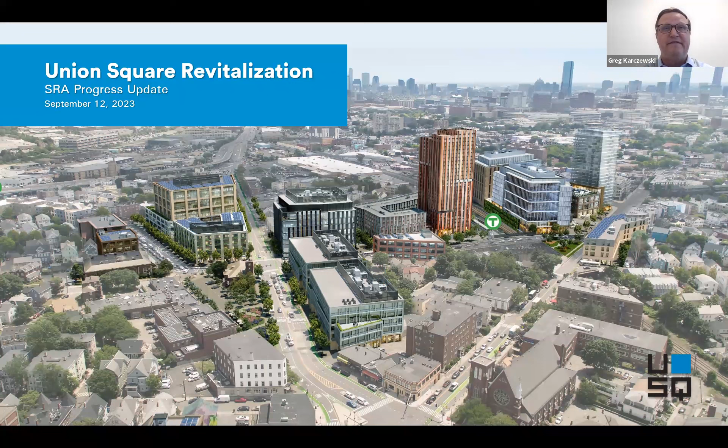The goal of the conversation tonight is to provide an update on how we're progressing against the master plan broadly, and then a more specific update around the initial phase, 10 to 50 Prospect, formerly known as D2. There'll be time for questions, and I also wanted to run through some of the community benefits work we've been doing over the last period of time.

From a master project update standpoint, to ground everybody in the foundation of the project, all the work we're doing goes back to the community's goals established in SomerVision, broadly around job creation, adding open space to Somerville, providing a mix of housing including affordable housing, and improving mobility in the many different ways to get in and around the city.

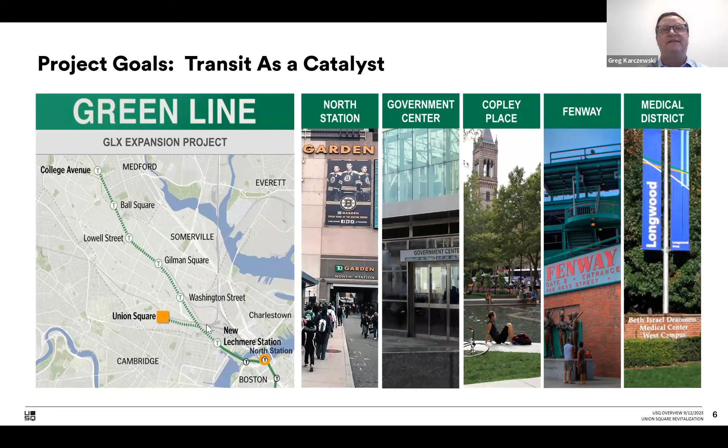More specifically, as it related to Union Square, it was focused on transforming Union Square into a dynamic mixed-use economic engine, really to restore it to its commercial past as a downtown in Somerville. Critical to that, as everybody knows, is the Green Line and the connectivity it would provide to the broader economy here in Boston.

Our process started before us back in 2012 with the approval of the revitalization plan. We were designated back in 2014. From 2014 to 2017, the city and community were leading a process that started with SomerVision and became increasingly more definitive about zoning and the neighborhood plan, ultimately resulting in a covenant related to the D blocks.

Since then, from 2017 through current, we went through design and site plan review on the first phase, negotiated a community benefits agreement—the first in the history of Somerville—completed the MEPA process, and then in the middle of the pandemic started construction on the phase 1 project, which we're nearly complete with.

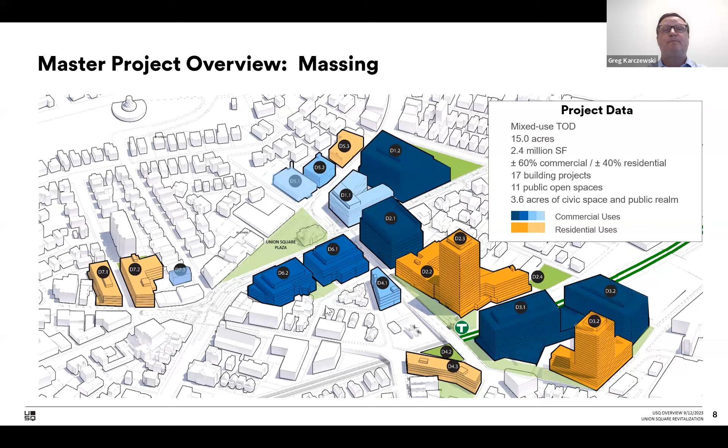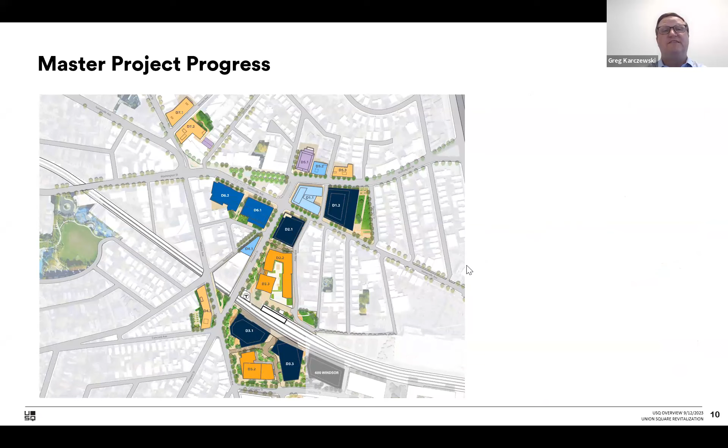All the buildings you see in some shade of blue are commercial projects, and all the buildings in some shade of orange are residential projects. Now just shifting views—same image, but in a site plan view. Again, commercial projects are in blue, residential projects are in orange.

I'm going to walk through where we've been focused, where we'll be focusing next, and what's happening with the master plan. Overall, the master plan is 2.4 million square feet. The D2 block, outlined here by number 1, is obviously the first phase. It's 607,000 square feet—we'll cover that in more detail as my comments continue—but that represents 25% of the overall master plan area.

We've also been advancing two other projects. One is the D3.1 block, immediately on the other side of the tracks from the D2 blocks - a 280,000 square foot life sciences project. The third project is our efforts to start the D4.3 affordable housing project. In total, these three projects would make up 40% of the master plan area.

The MLDA requires that we get 50% done by 2037. So just to put in context expectations around timing, we continue to work out of our offices here at 31 Union Square every day to advance the overall master plan. But that gives you a sense of how we're progressing against the broader objectives outlined in the MLDA.

In addition, there are a number of other sites where we've been in some level of pursuit activity, whether that's additional planning related to those sites, business plan development, or interactions with the owners around acquisition. You can see those blocks outlined by this P for pursuit.

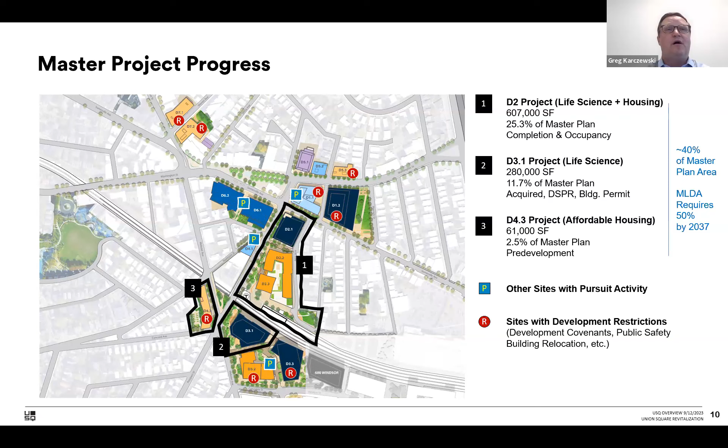We also wanted to highlight that there are some restrictions on various sites within the master plan that preclude their immediate development. Whether there's our development covenant with the city that precludes any additional residential development until the second commercial building is developed, or the public safety building relocation, which occupies a large portion of the D1 block, or the covenant that sits on the Royal Hospitality site - all sites with an R on them have some sort of constraint at this moment. We continue to pursue and monitor them, working towards removing those constraints so we can implement the entirety of the plan.

So that's a bit of an overview on the master plan. We'll now transition to the D2 project, or 10 to 50 Prospect. We're putting the D2 label away after many years.

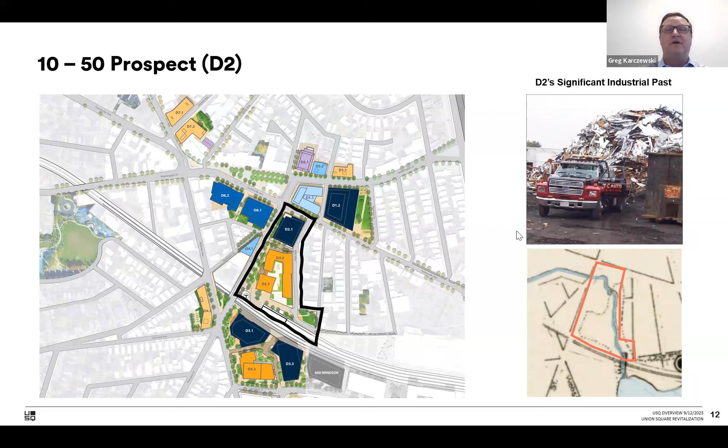D2, as you may remember, has a really significant industrial past. It had environmental contamination - it was a scrapyard. A majority of the site was a scrapyard, and the Millers River actually ran through the site at one point in its history. So the city's vision really was, because of its location next to the T, to make it the first phase of the revitalization and really reclaim the property and transform it into a productive use.

As the plan for D2 evolved, we were excited that the plans really were emblematic of all the different goals of SomerVision. First, the creation of new mobility infrastructure - we'll talk about the work we've done with the T to enable the station opening. New housing, including 90 affordable housing units, space for 500 new employees and jobs, over 33,000 square feet of open space, and a number of economic and fiscal benefits in the form of taxes, as well as acquisition of the property. In addition, D2 plays an important role in connecting the longtime living room of the community, Union Square Plaza, with the new node in the neighborhood, the MBTA station. So really finishing that streetscape along Prospect was viewed as an important goal for the project.

Now I'm going to show you over the last 30 months in 30 seconds, kind of the work that's been done on site here. Let me get this started.

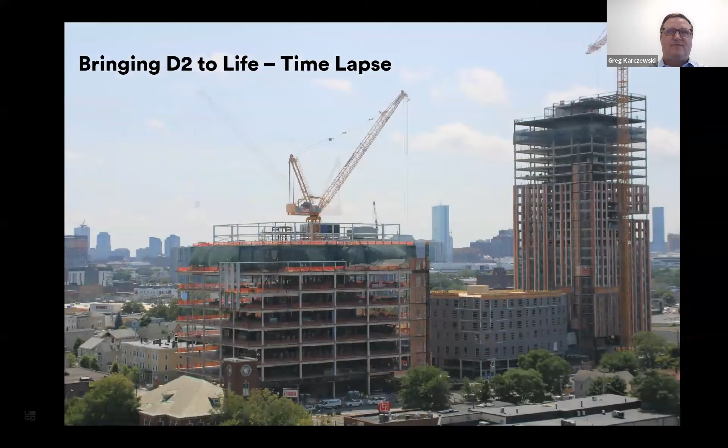And if only it was that easy, right? So that's a current view of the building.

The city staff had asked me to walk through the various components of the D2 project. The composition of the project really is there's two building permit buildings: the 10 Prospect Street building, which is the lab building or D2.1, and then the 20 to 50 Prospect building, which is the D2.2-3 building, the residential building. There's also two other lots created as part of the permit - a civic space lot, which is the public open space, and a thoroughfare lot. So I'm going to walk through each of these components of the project to give you an update as to how we're progressing.

And so the photo of the lab building that you see is a recent photo. The building itself, as you can see, is largely completed. It's 180,000 gross square feet of floor area, primarily life sciences, and includes some retail and ACE space.

We were able to work through the process with the city staff to gain a certificate of occupancy on July 28th, 2023 for the base building itself. Leasing activity is ongoing, and we're working towards final completion of this building and closing out conditions that are part of all of our permits in October of 2023. That would include, hopefully, a certificate of completion from the Somerville Redevelopment Authority, which is on the agenda after our conversation here.

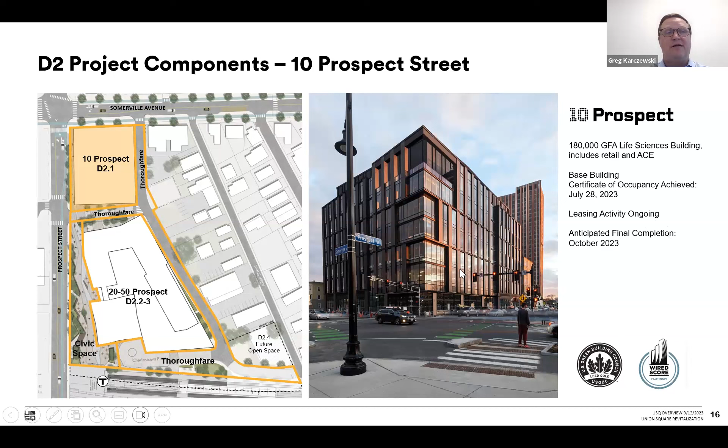The building will be LEED Gold certified, and also Wired Score Platinum. Wired Score is a measure of connectivity, so it's the highest level of connectivity, which we're excited about and is obviously important to the life sciences tenants.

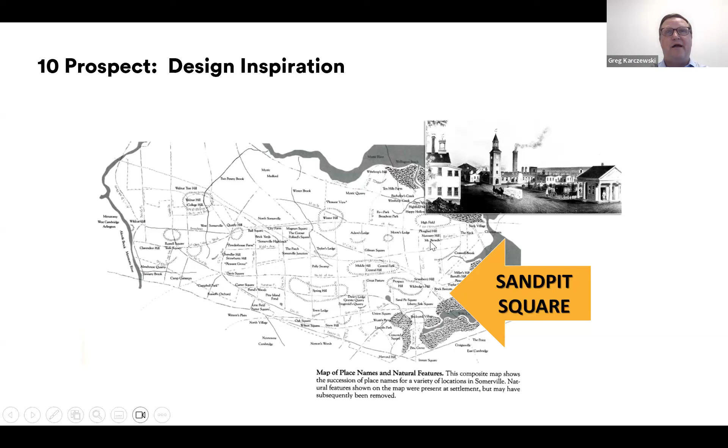The design inspiration for the building itself was originally Union Square. At one point in its history, Union Square was called Sandpit Square because of the silica that existed there, and it was a center of commerce with brick making, glass making, and copper tube manufacturing. So we really tried to draw those elements, those materials, into the building's facade to be a modern representation of the materials that were the foundation for the commerce that occurred here.

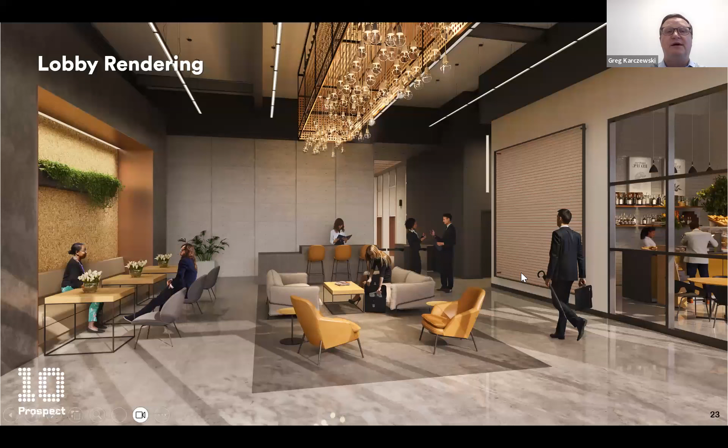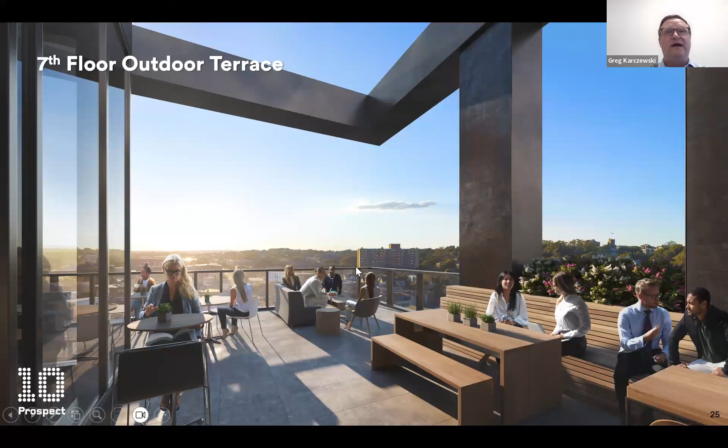And here's the 7th floor of the building. We're putting in an amenity space for the tenants that has an indoor component as well as an outdoor component, offering great views west and north towards the Prospect Hill Monument. The views from up there have been great and well received by the tenant prospects we've toured through the building. In addition to that amenity space, in recognition of our goal to create an ecosystem in Union Square that caters to startups, medium-sized, and ultimately mature companies, we've opted with this first building to convert 2 of the floors to suites.

And then this is the, yes, Phil. Greg, can you excuse me for 1 second? Ben Ewan-Campen has to go to a finance committee meeting. He has a couple of questions he'd like to pose prior to him leaving, if you don't mind me interrupting you for those. Absolutely, would welcome the questions. Thank you, Chair. All right, Ben, go ahead. Thank you, Mr. Chair, and through you, thank you everybody for your indulgence. My apologies. Thank you, Greg.

I look forward to reviewing the rest of your presentation. I have 2 questions, and maybe you're going to get to this. Can you give a brief timeline update on D3, the 50 Beacon site?

Sure, through the chair to member Ewan-Campen. The 50 Beacon site, we've completed design and site plan review. We've submitted for building permit, so it's in for city review. You may remember that's a 280,000 square foot life sciences building with around 16,000 square feet of new public space. That building is also adjacent to the MBTA tracks and right of way, so there's a process we need to go through with the MBTA called an access license. That's usually a pretty lengthy process to be able to build in that corridor adjacent to the right of way, and we're simultaneously going through that alongside the building permit process right now.

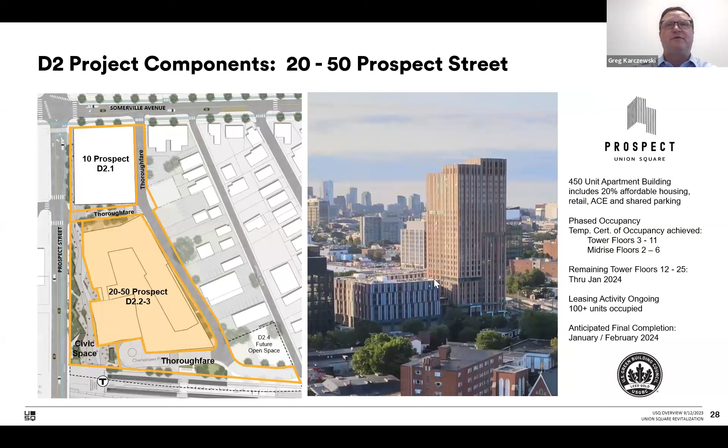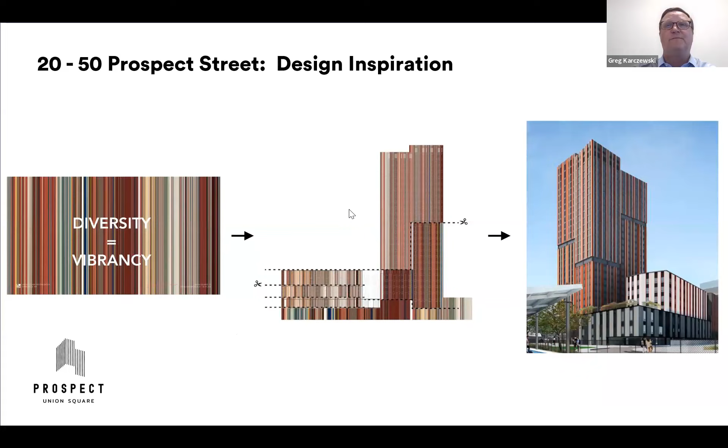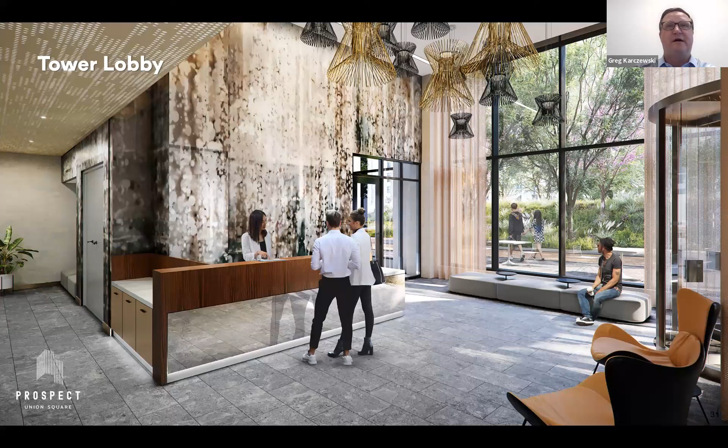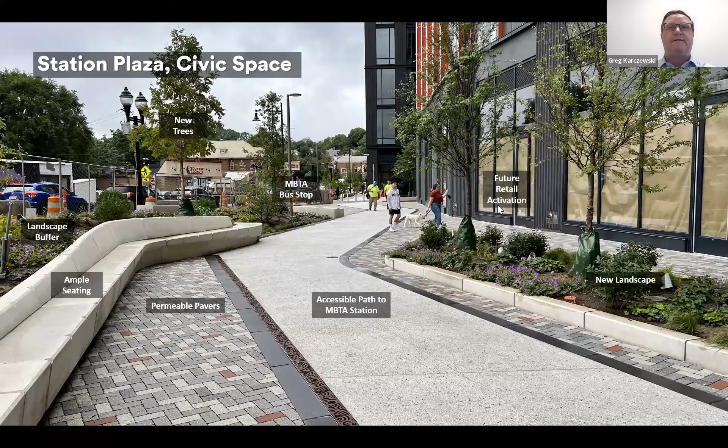Here's a recent image from the plaza looking north towards the 10 Prospect Street building. The plaza includes a lot of excellent elements, the new landscaping. This is the accessible path to and from the MBTA station in the middle, permeable pavers, ample seating, new trees and landscaping.

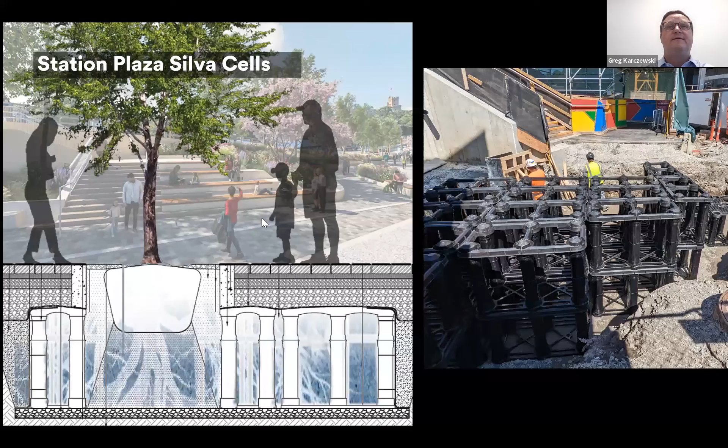The plaza includes something unique in that it has silva cells underneath each of the trees, intended to promote full growth of those trees to create an urban tree canopy that'll help with heat island effect. So we're excited to see how that continues to play out.

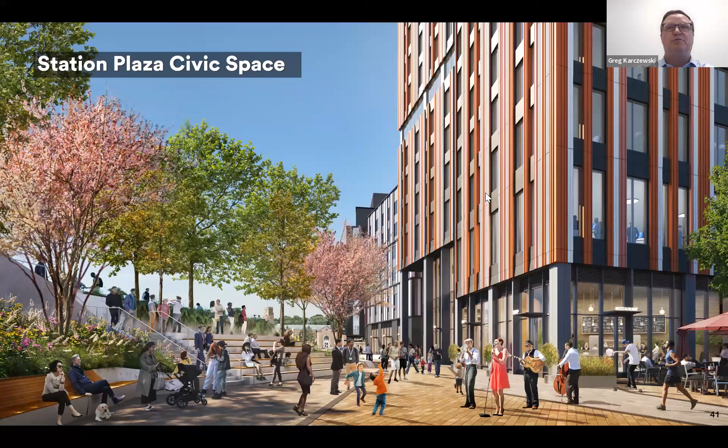This is an image of a rendering of the plaza. The area in the foreground, this amphitheater, is currently being constructed on site right now. So that's kind of the last remaining piece that they're working on.

And then the last component here really relates to thoroughfares and infrastructure. There are 3 thoroughfares: Milk Alley, which is ostensibly a service alley running through the back of the site; Bennett Court, which is between the two buildings; and Charlestown Place, which is between the residential building and the MBTA station.

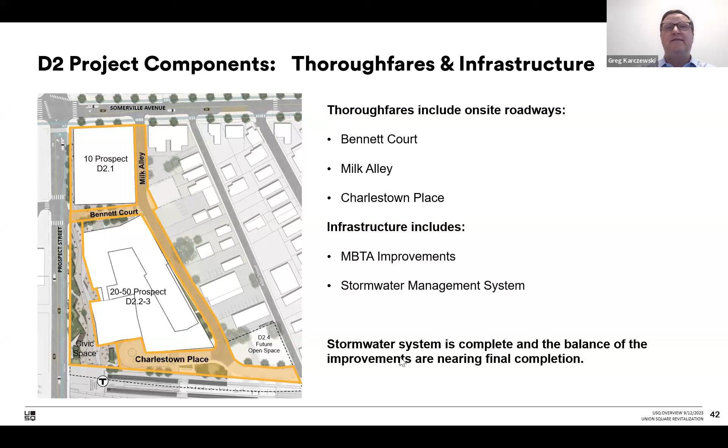In addition, there's some infrastructure that's been really critical to the project. One is the MBTA improvements, and then the stormwater management system. The stormwater management system is complete, and the balance of these improvements are nearing final completion. I'll show you a series of images.

In terms of MBTA infrastructure, there were really 5 different items that we committed to deliver for the T. Some of those were delivered back in March of 2022 when the station opened, and others were anticipated to be delivered when we were closer to final completion. So the employee break room for the MBTA, which is currently in a temporary trailer, is being completed within the building. The bike racks and storage are complete.

The ride drop off will be in the next 60 days. The accessible path to and from the station is complete. And the elevator, the MBTA elevator, was in place last year for the opening of the station.

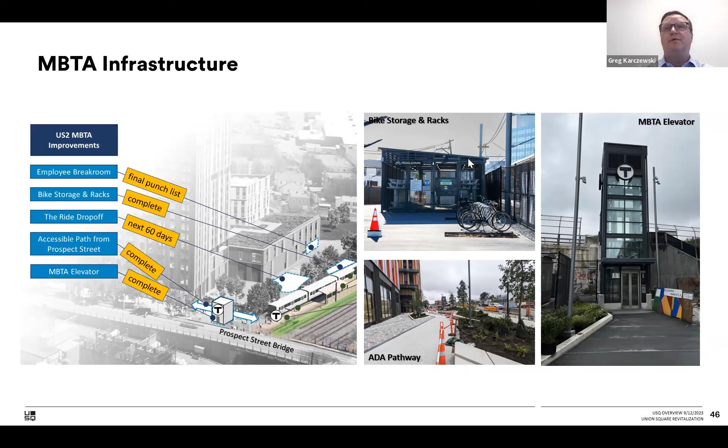And obviously the opening was a big event for everybody. Our temporary improvements, interim improvements, were able to support that opening despite the fact that our construction was continuing. So a lot of great coordination between the T's team, city's team, and our team to make that all happen. And then the last piece of infrastructure is an important one.

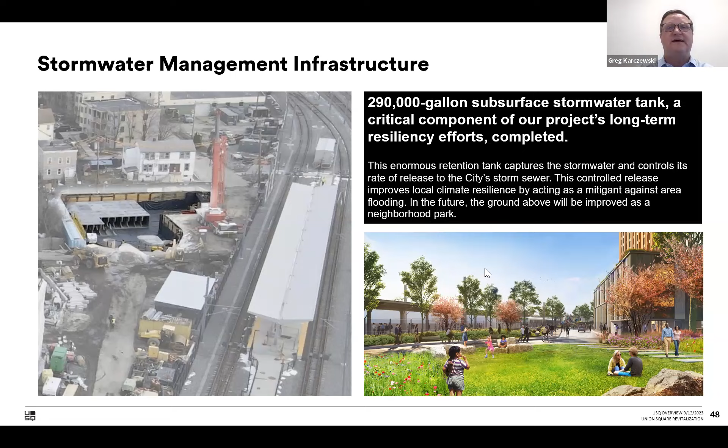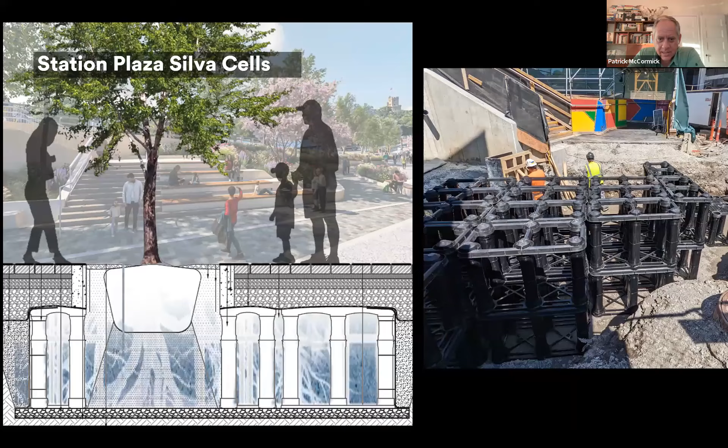Yeah, thanks Greg, for this really helpful presentation. Just a couple of questions. One more specific, and I might have missed the detail. If you could go back to the overview of the different parcels. And another one more general: on the timing for that dedicated affordable housing site, it sounded like that's coming pretty soon.

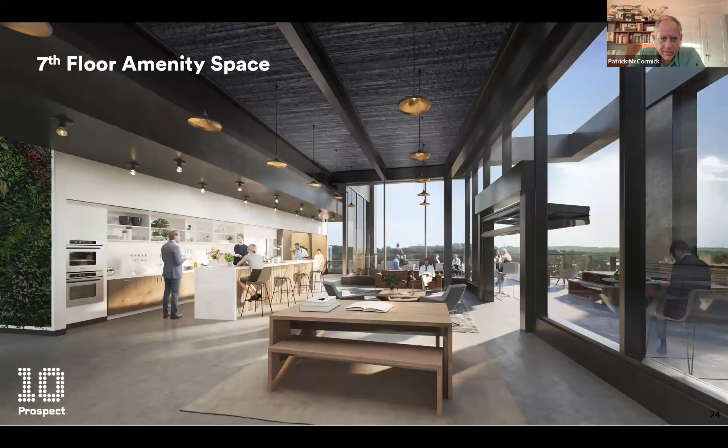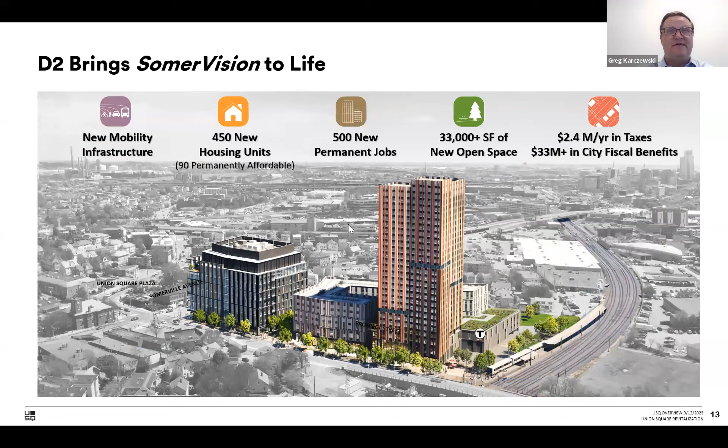Through the chair to Member McCormick. Yes, thank you for asking the question. Sorry, it's taken me a little bit to get back to that slide. So that affordable housing project, D4.3, was a project that we, along with the neighborhood council, identified through the CBA process to be a largely affordable project rather than 20% affordable. When the city passed the 2019 zoning, which happened after the CBA was finalized, it effectively precluded our ability to do that project. We spent a lot of time through the pandemic trying to find a way to make it happen. Through some brainstorming with the city and the mayor and the neighborhood council, we're getting much closer to an alternative path forward. We've had some really constructive conversations with the neighborhood council over the last month and a half, and we're getting close to, I think, having a path forward for that project, which is very exciting. So I'm anticipating there'll be more activity happening here once we can break through that piece, which has been the hang-up with that particular site.

Right, through you, Mr. Chair. Okay, understood. I had missed that restriction, so that's helpful. Hopefully we can see some movement on that. My more general question, it might apply to some of the restrictions, but maybe also some of the market forces. I was just wondering, in general, what changes, good or bad, are you seeing in terms of being able to achieve the goals that we've collectively had. Are any of the current market forces, or perhaps some of the harder to resolve development restrictions, the biggest obstacles you feel like are faced at the moment?

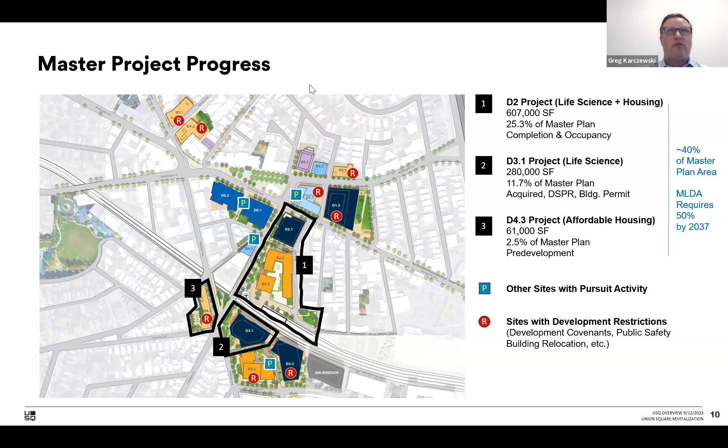The next item on the agenda is Part B: Master Land Disposition Agreement and a Certificate of Compliance Process introduction.

This should be a fairly quick item. Kathy, please step in if there's anything you want to add. As Greg mentioned, and as many of you are already aware, the Redevelopment Authority and US2 entered in 2017 into what's called a Master Land Disposition Agreement, or MLDA, which outlines each party's responsibilities in relation to development in Union Square. This document is found online, and I also sent it in our most recent communication with SRA members.

Part of the process outlined in the MLDA is that US2 will apply for what are called certificates of compliance for various phases of development. These basically confirm that the Redevelopment Authority members believe US2 has developed the disposition parcel in question in compliance with the Urban Renewal Plan and all subsequent planning board decisions. I mostly wanted to put this on SRA members' radars. Staff are currently working on a review process for these certificates of compliance, so wanted to bring it to your attention as we get closer to completion on 10 Prospect Street, or D2.1, as Greg was talking about. We'll have more information about this process in the coming months.

Okay, thank you. Any questions for Ben on that? All right, seeing none, the next item on the agenda is 90 Washington Street.